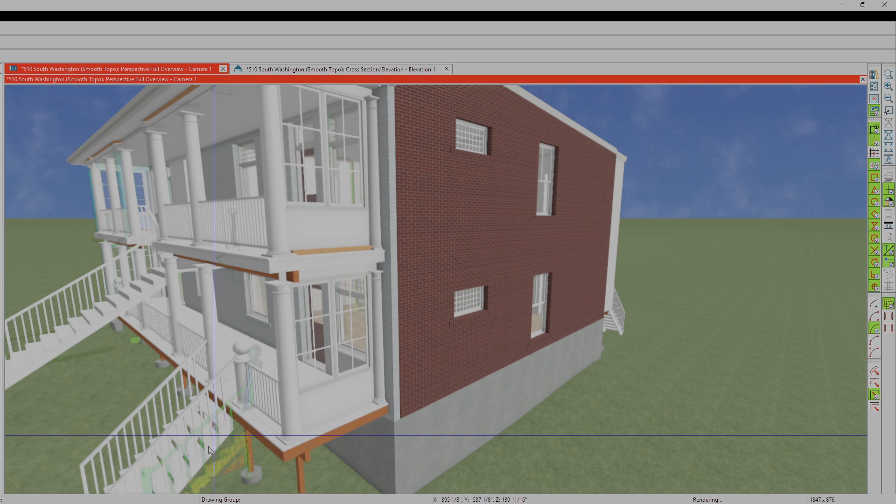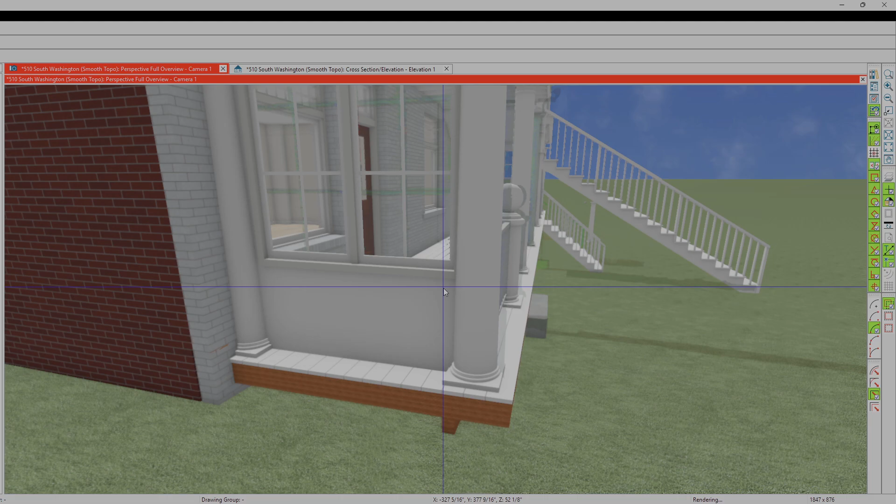I have got a few questions for the client on this project, and what you're seeing with these color things here are the ReCap visuals. Maybe that's a little hard to understand, but they're just section cuts through the 3D LiDAR scan that I brought into this model, and it allows me to take a look and determine what's going on.

You can see across this roof there was a lot of buildup and grime and stuff up here. So the fact that these are a little high, maybe okay, looks a little too high.

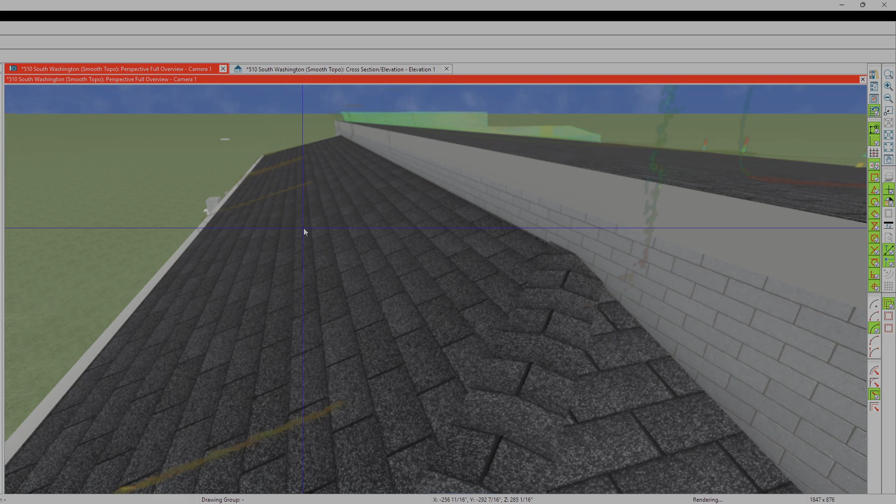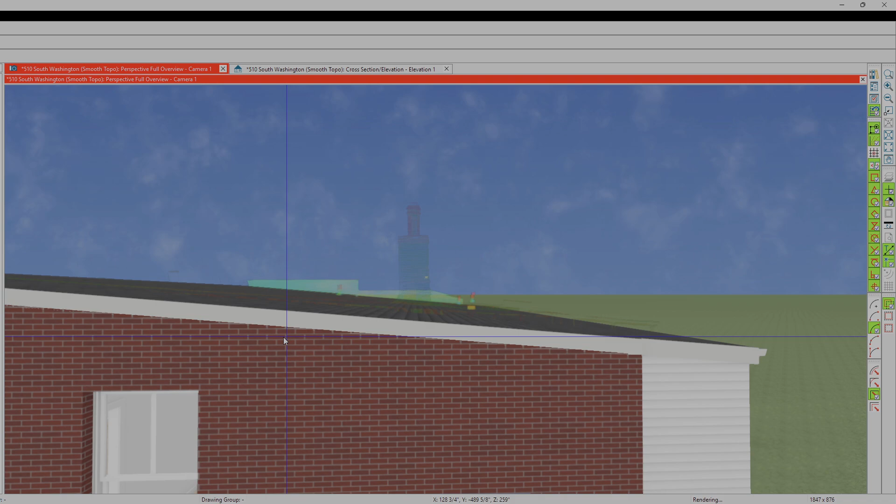So I have some adjusting to do, but the issue is that I need to build out all the brick detail. I need to build these parapets across the front and across the side, and then get the chimneys and all that stuff in here. Get this roof into the right type of roof, put the parapet on this side, and the brick detail work that goes onto a building like this. It's not exactly brick by brick, but it's a lot of very meticulous detail work.

So before I do that, I guess I've been requesting some feedback, and I know you've been out of town, but when you get an opportunity, I really need to discuss this, because I need to know basically what we're going to ask for from the URA.

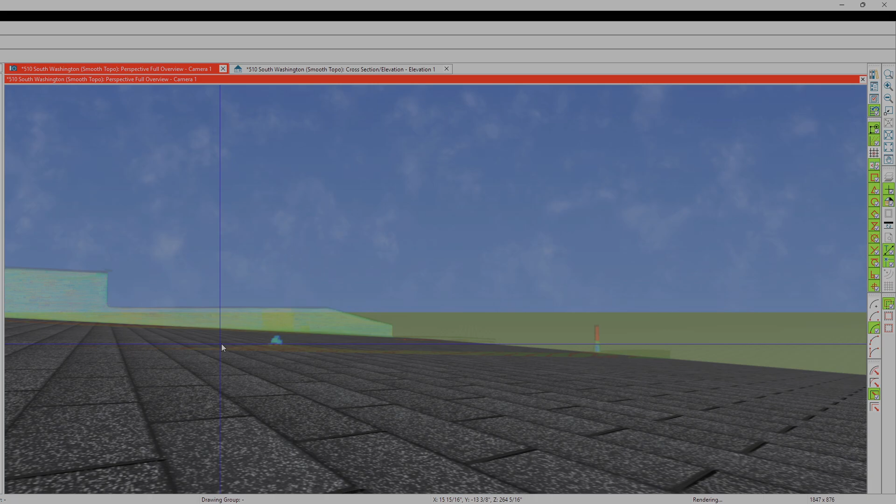There's a possibility that some of this may be able to be somewhat corrected, and I'll show you why. If you notice, this roof fades into the roof here, and when I go down below, it looks really good, and then all of a sudden it starts to pop out in the back half, and it gets pretty extreme as we get further and further out.

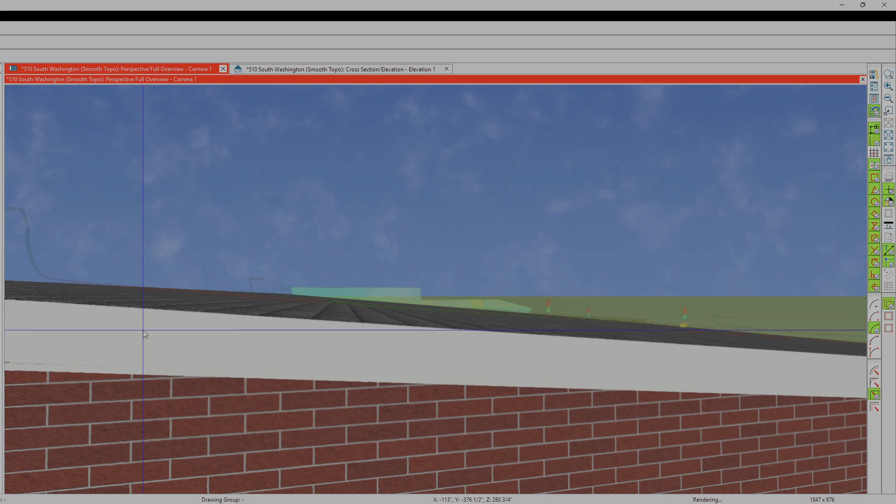And you can see this one probably needs to be adjusted overall, but you can see it just gets more and more extreme as all of them do, and they all get worse towards this back end. This is almost right on, but it's not perfect.

So again, it's being pushed up, and where that's occurring is if I go down in this crawl space, I started laying in some of the beams and stuff, and I need to put a section cut right at this location. I haven't put in that one yet, but it's items like this.

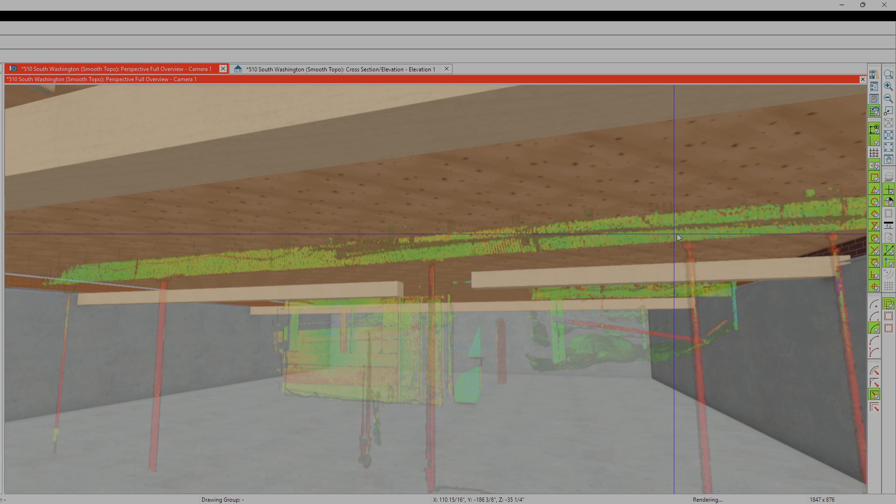This jack system, these screw jacks have been placed, and they've been raised to an extent that's actually lifting the floor on this back half. So it must have been done on several occasions, or the whole front half of the building is sinking.

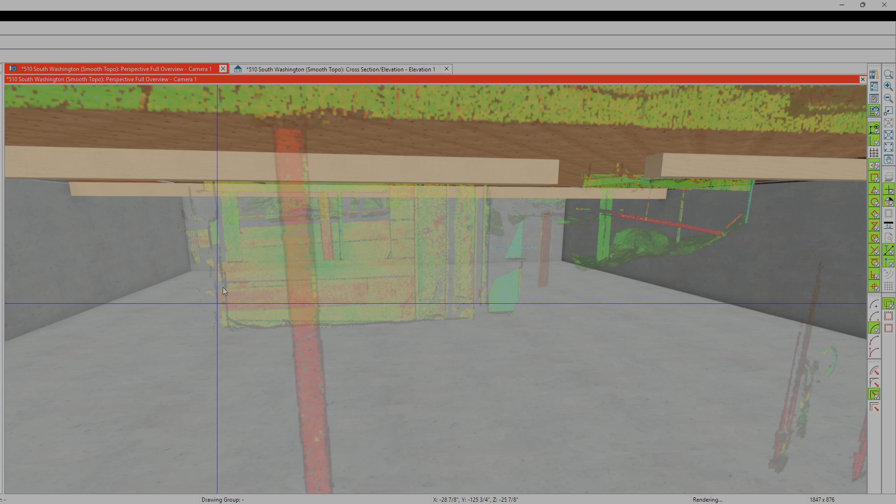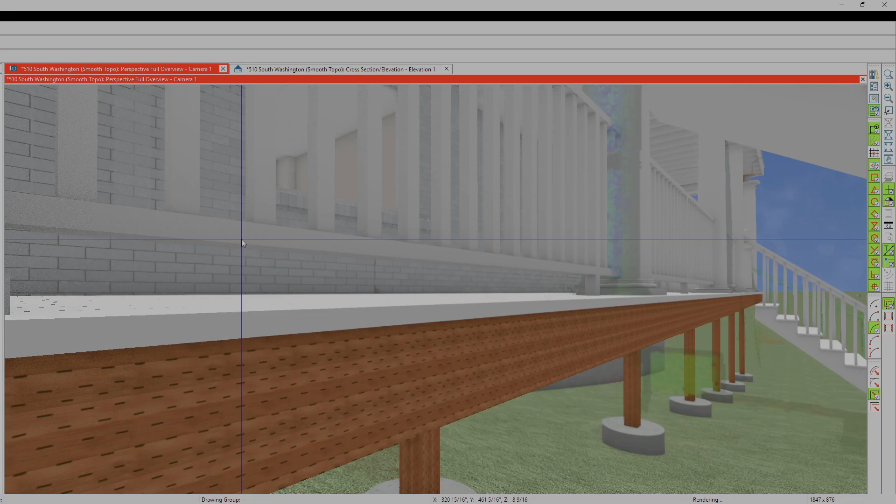Even if we decide not to correct the issue, I think we need to make sure that it doesn't get worse and that you lose the building. So we've got the drainage issues that are on the south side, and probably need to look a little harder at just making sure that we don't have the same types of issues on the north side.

And I'd like to speak to you about our URA approach before I wrap this up, to find out for certain if we are going to be, whether or not we're going to ask for money for that.

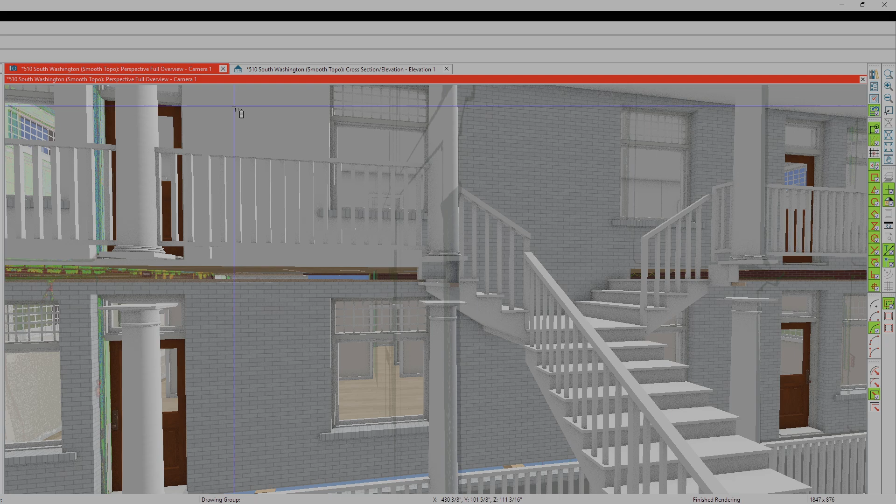And so I missed it. There we go. Nope. Control Z.

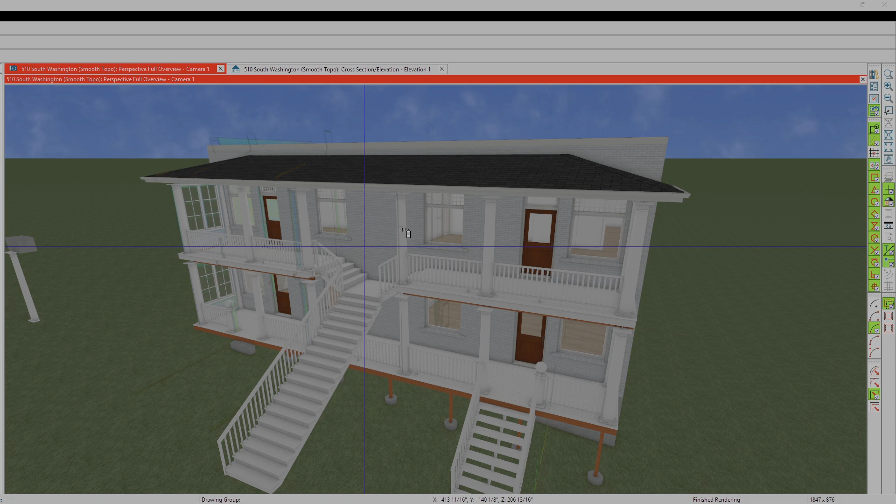So I will get some other views. I want to add some other views into the way that this looks. Sorry, I paused that slightly because I was trying to correct this brick. And it's a little difficult to correct the brick using these, because these images, oops, I may have just painted that. Yep, I did.

Oh, in fact, that's great, because now you can see that see-through image. I just painted it brick color, but it's actually an object, it's called a face. I'm going to Control Z to get that to undo, then I'll hit escape. So it's hard to select through these.

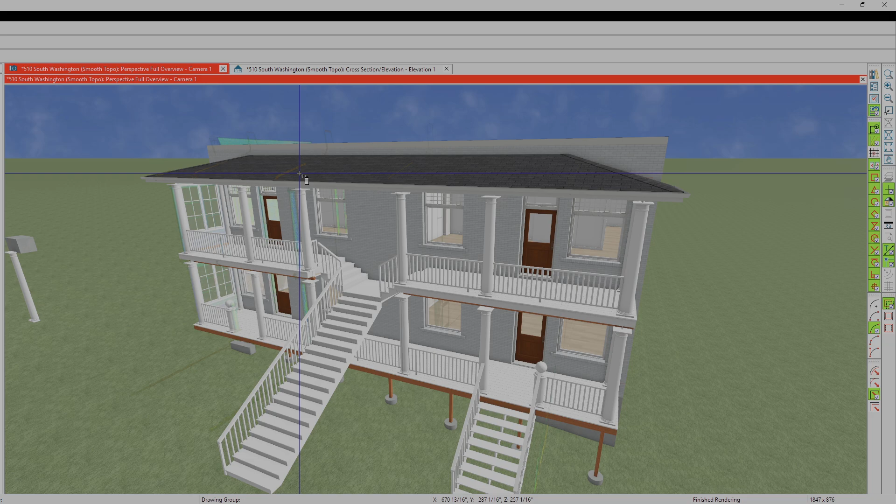There's been a request I've had with Chief to give us PNGs that we can make transparent, because the issue is if they're full brightness, then in other views such as section views I can't see very well.

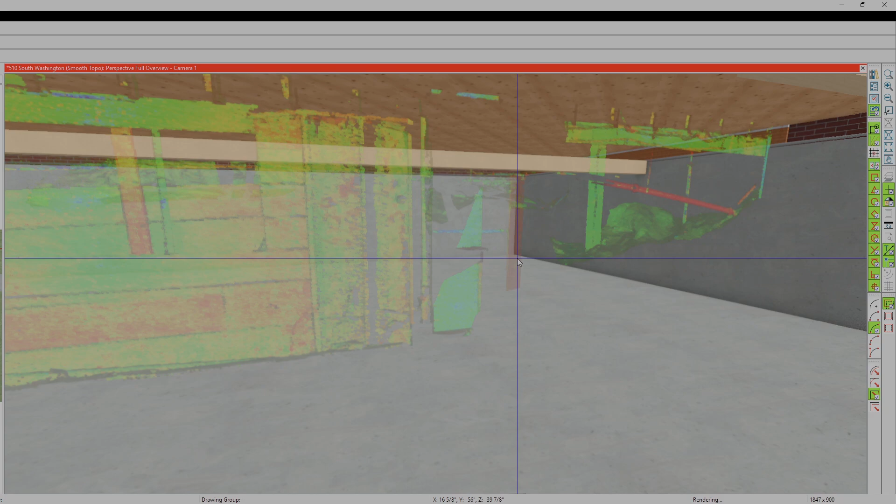So down here in the crawl space, let me turn this layer thing off. These jacks I think have been over lifted. It's that or this end has settled even greater.

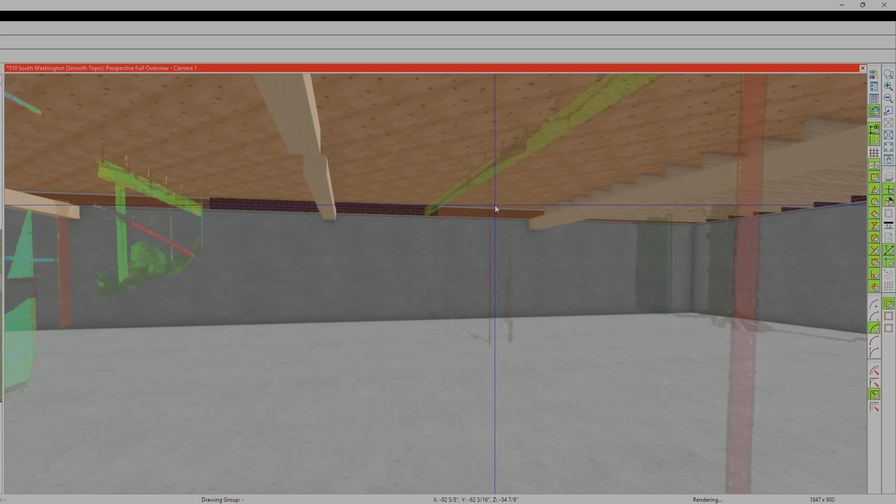So determining which, I'll get more answers the more I continue to put all the beam work and stuff in here. But that's not part of our original scope at this point. We're getting a little further along, and so I need to discuss how we're going to approach them, because what I'm concerned with is that your building gets further damaged to an extent that you actually risk losing it.

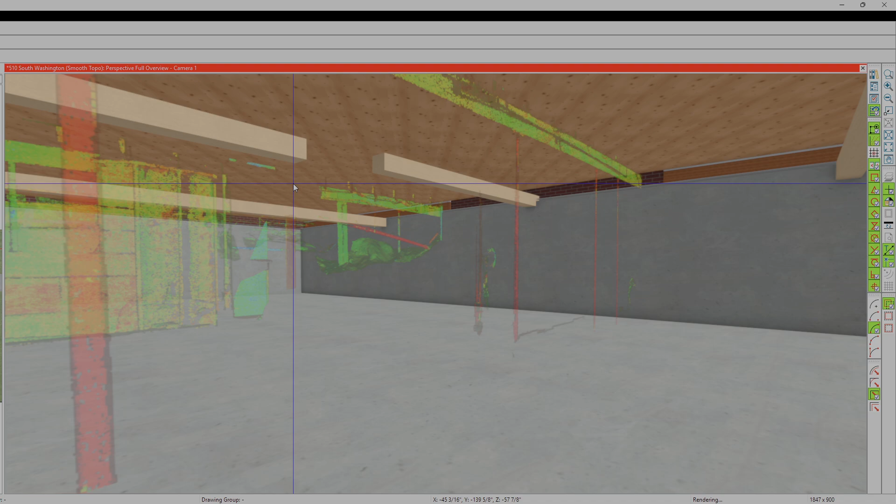So I will supply some other images and then we can discuss this. I went through and I changed some of the materials, and the EPDM helps the scan show up pretty clear.

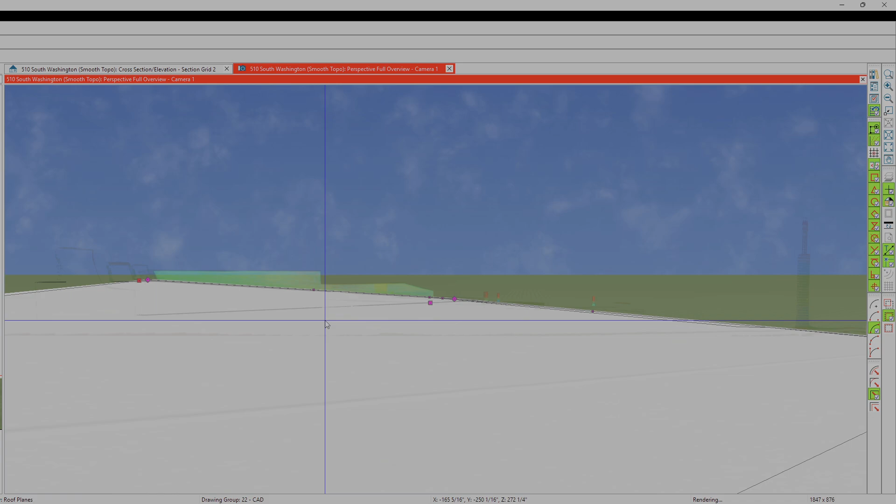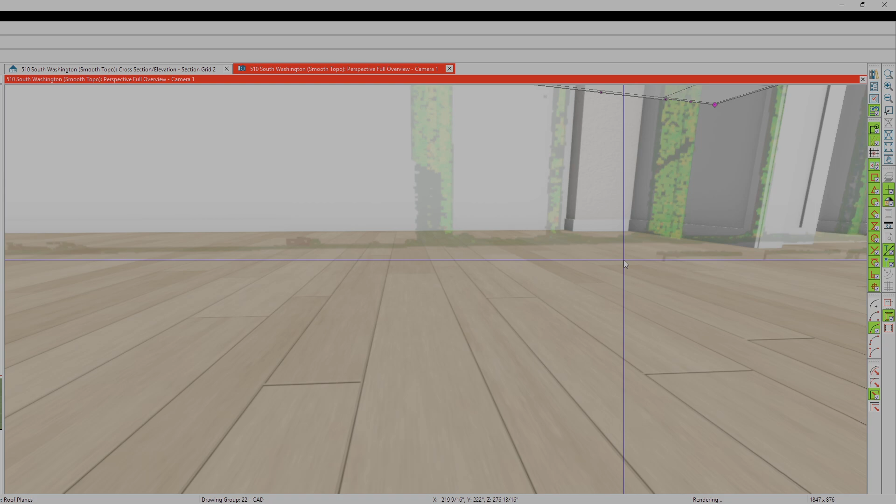Also doing some changes on the way I've got the floor and levels set up to match what I'm getting out of the scans, and we have to do some slight adjusting because I'm still getting these scans showing up above, but there was a lot of dirt and debris. Back here, this is where the problem starts to show up.

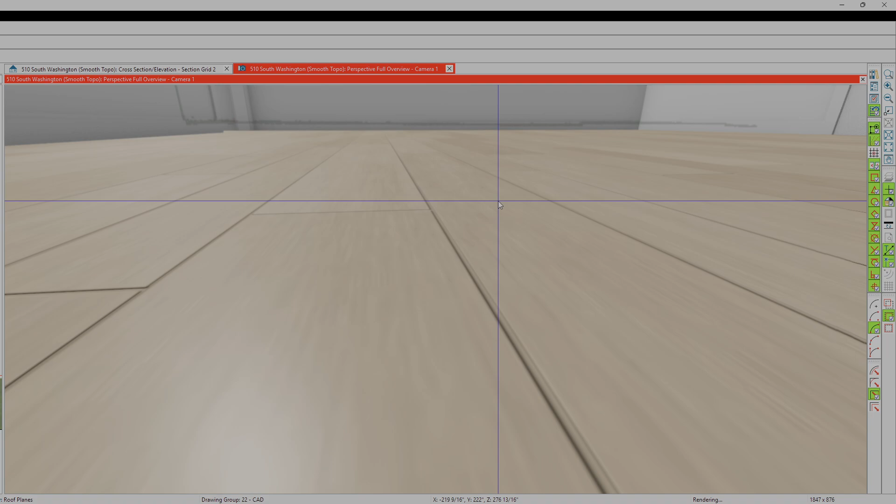As you can see, that just gets higher and higher, and it's substantial. Looking back towards the front, the whole wall disappears into the floor, as it should, and I think it should be a little bit more, but I'll keep correcting that. I'd like to get some answers on what we're going to actually try and correct in the field.

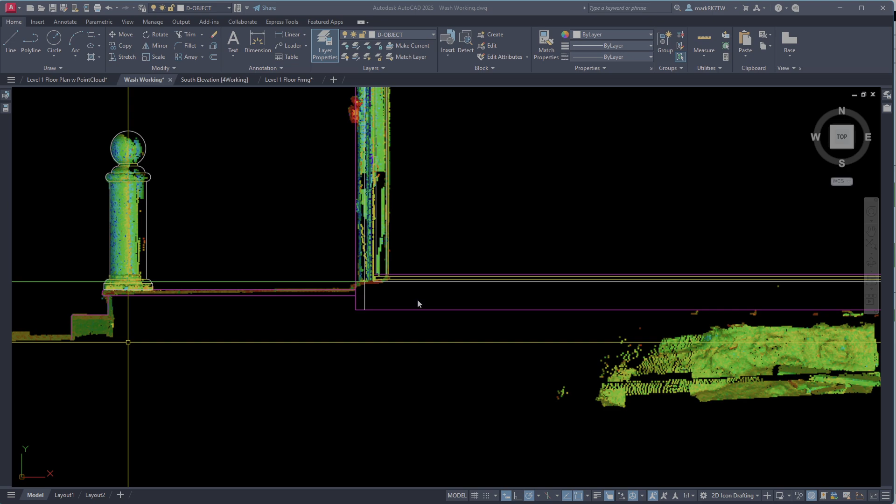Here in AutoCAD, you can see I've got the scans and stuff, but you can tell where it really is dropping off, and this is how I'm getting my heights determined.

So this is the 2 layers of 1/2 inch. I've got a 5/8 inch finish wood, which we don't have installed yet, and then the 3/4 inch. So that's a 1/2, 1, and then 3/4 of that angled planking that's in the house, and that serves the same for both layers, or both levels I should say.

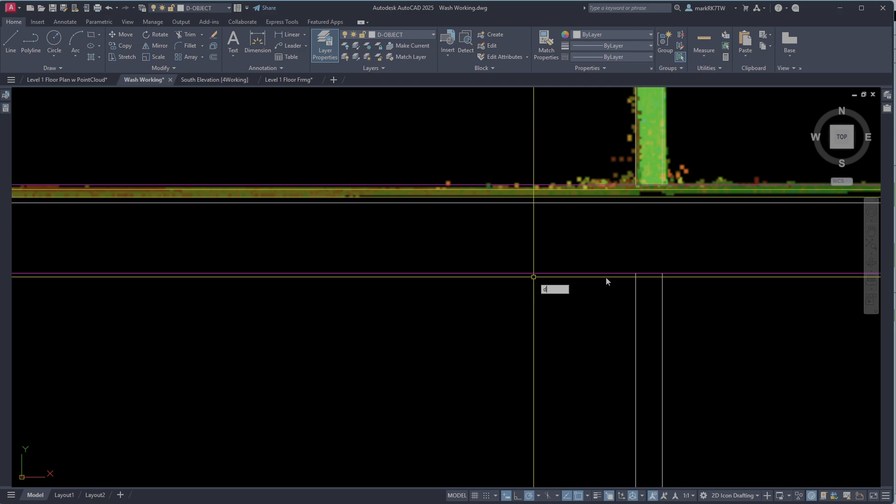Then there's the beam dimension, and you can see that's 9 1/4. It might be a little hard to read, but that's what that's reading if you can't see it on the screen.

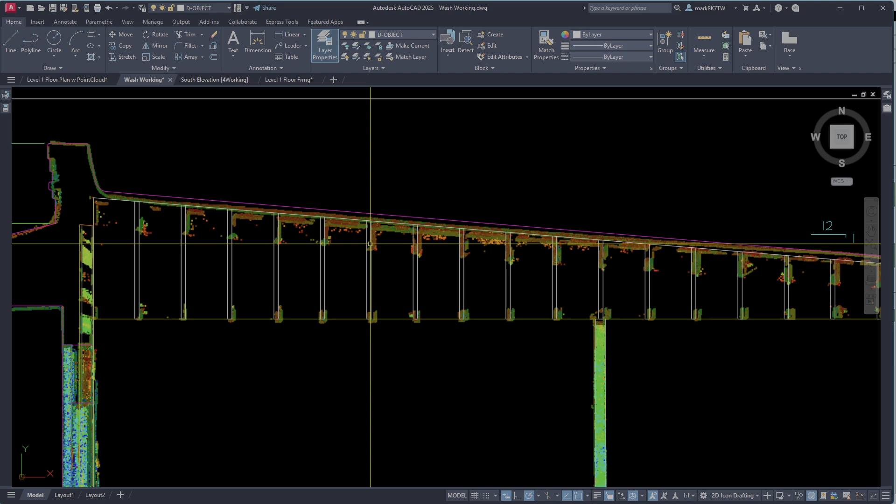When I start to pull all this in, I've got to get the best average pitch, and so you can see here I'm above, here I'm passing through, and then here I'm quite a bit below, and this is where the whole system's been shoved upward.

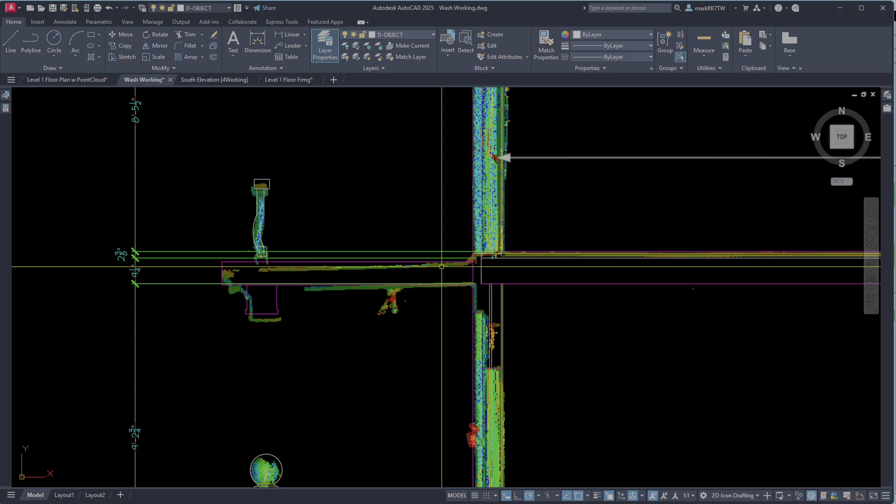Where this is dropped, what I've done is just kind of taken the average going up, creating straight lines off of places where I feel things have remained stable, but you can see the slope through here. Using this as a guide for the size, it's just pushed up to where it should be, and then up here we'll have the roof.

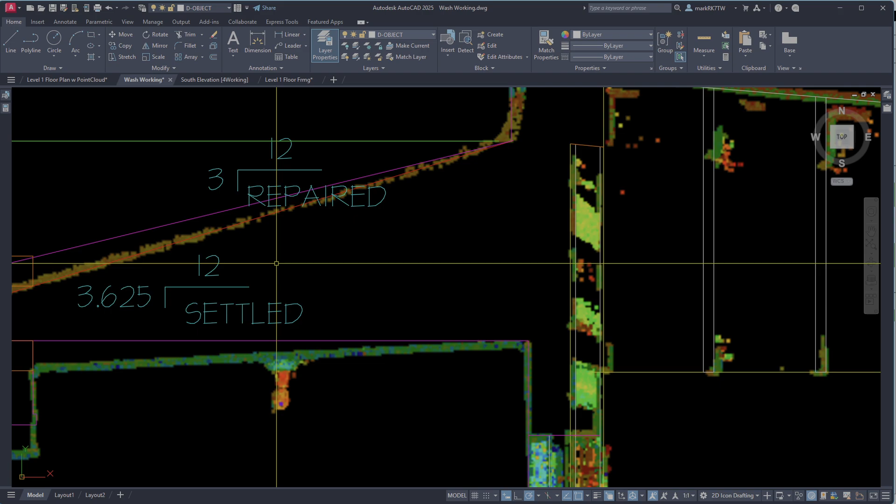Right now I do need to correct the roof, and so what I've got is I'm showing about 5/8, 3 5/8, and 12 is how it's settled. When I flatten it out, it becomes very close to a 3 and 12. So I believe it probably was originally a 3/12 pitch.

This averages out to a 1/12 pitch, and trying to draw all these individual trusses would be a nightmare because each one would have to be individual.

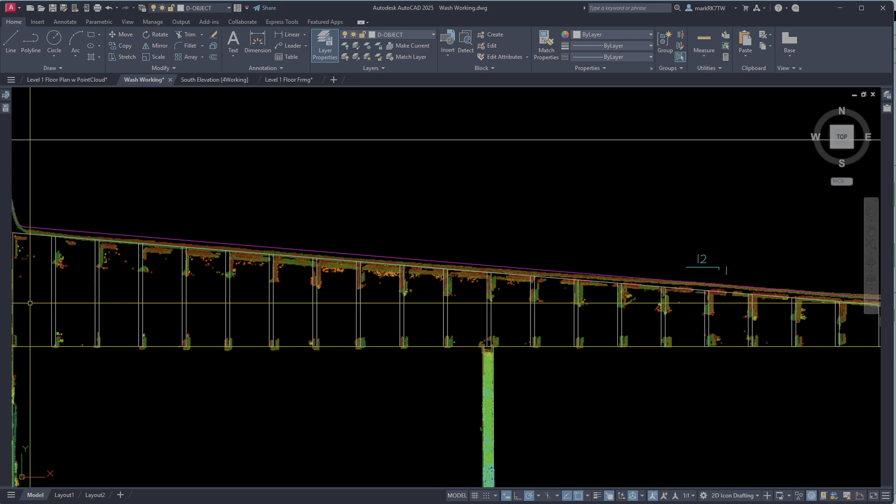So I'm going to frame it as if the trusses were running the way we would in modern day, but it shouldn't affect what we're doing because we're not changing what's going on up here, unless you want to do some of the repair work.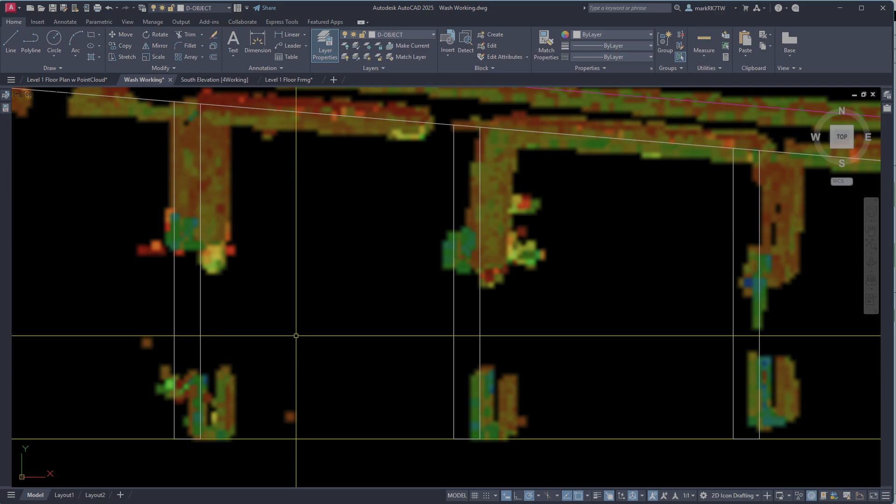You can see there's, for the most part, like that member seems off, this one seems off, but if you look, there's something going on in the background for those, and the rest of them, they're fading off, meaning they didn't get them exactly at the on-center that I have, which I am showing them at 16 inches on center. As I get closer up in here, they match really well. It's just old construction, and it's just faded off a little bit.

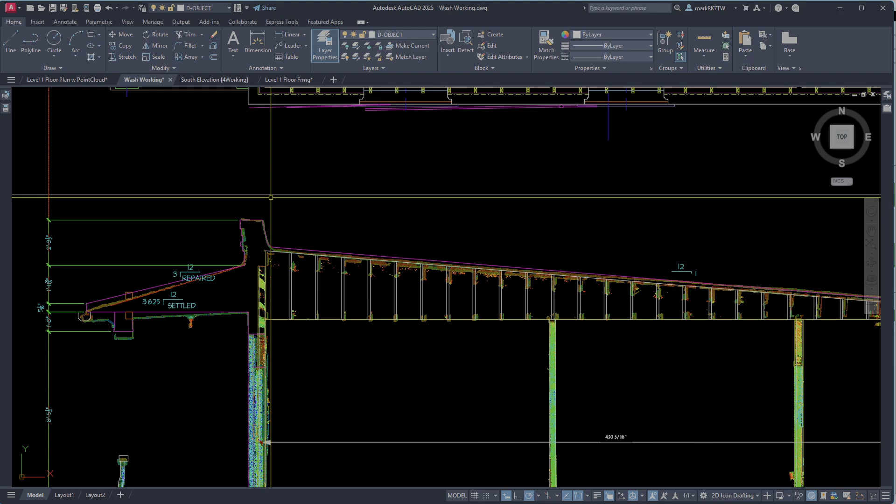So just kind of getting a trace layout for this parapet, so I've got something to go off of to do this brickwork.

Down in here, this is dirt, and I'm a little concerned about some of the excavation that's gone on over time and what that might be causing as we go through this.

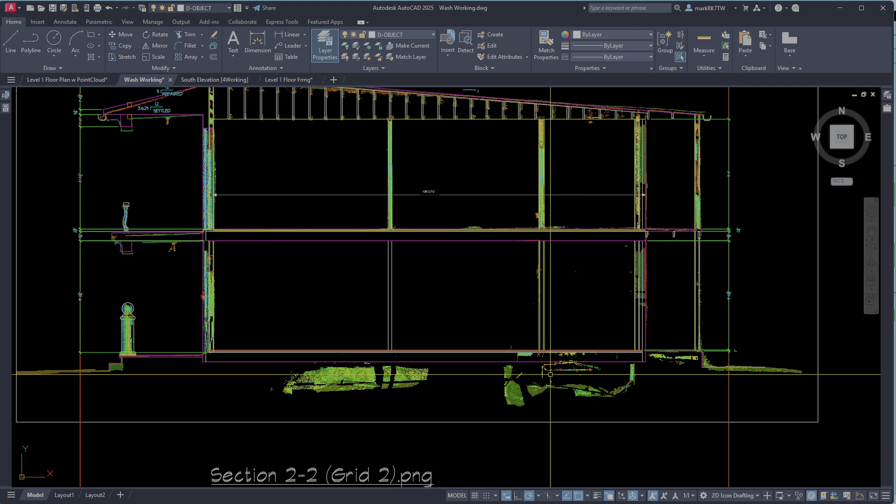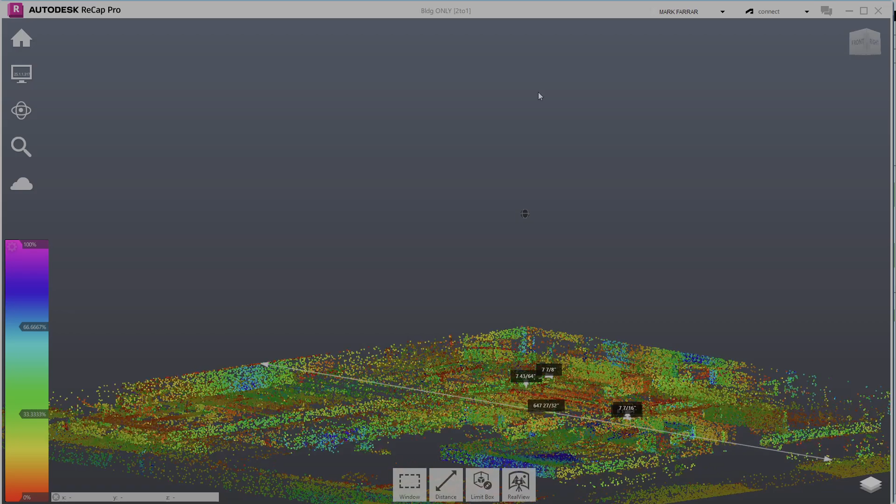And so here in ReCap, this is just the lower floor system, and you can see that there's some dirt and stuff showing up there, and then trying to capture every bit of it is just such tight quarters that it's not completely captured.

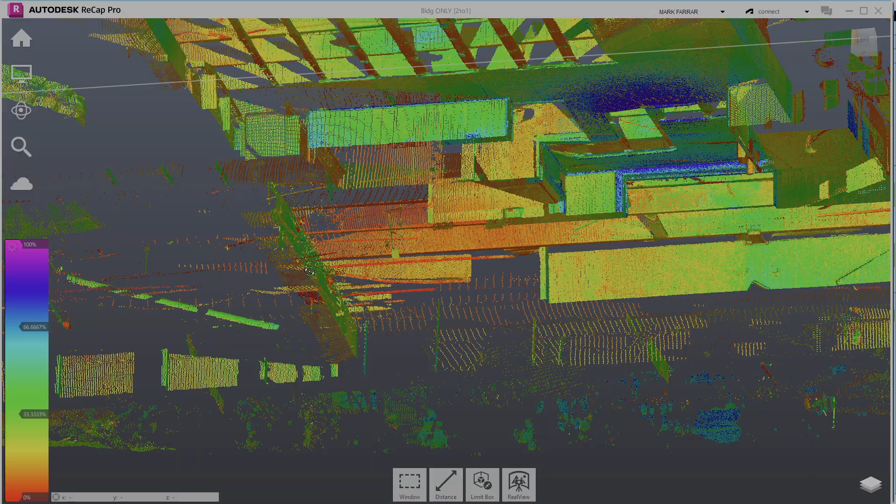But we've got the basis for information, and what I've been working on is trying to figure out where these beams are. If I look underneath, you can see there's a beam here, and these tend to be about 8 by 8 beams through there, and there's a couple of those.

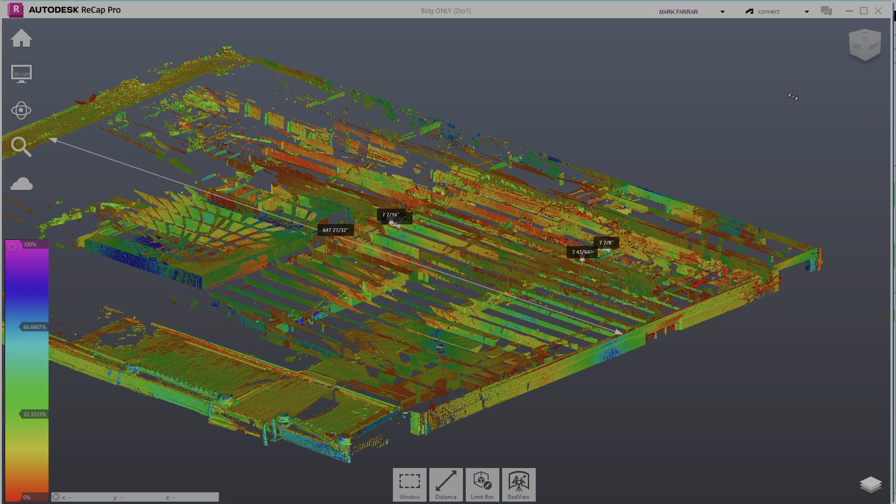But then in this mid portion, I've got to do a little more digging around to try and figure out exactly what's holding this up, so we can try and correct it if we need to. That's where I'm kind of looking to, you know, what do we want to accomplish with this. So I'm going to show you here.

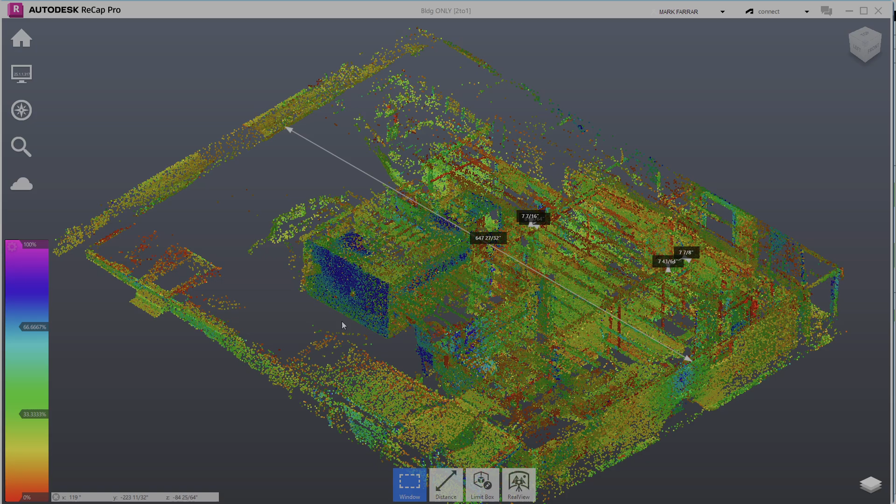I'm going to go to edit. Sometimes it'd be hard to grab this. There we go, and I can bring it down. Now let's confirm that. So there's a room in here.

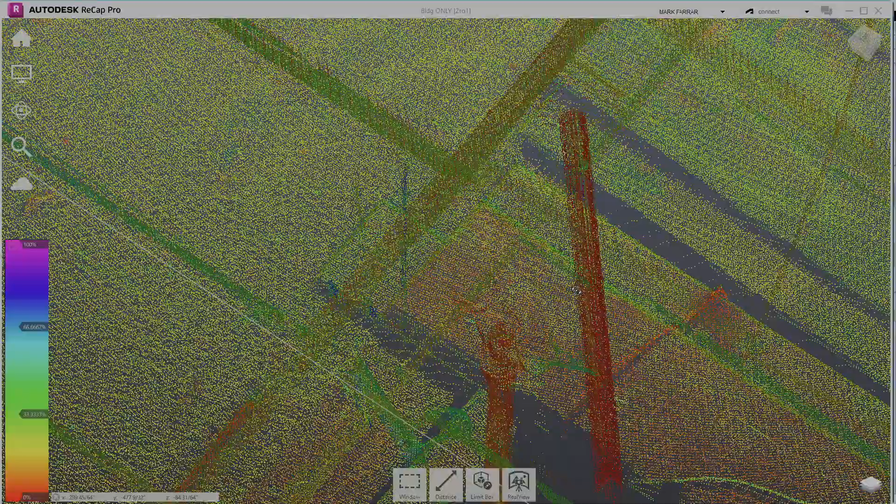And then I've got all these posts, and you can kind of see them through there. If I go up top, it's a little easier to see, and I could actually turn off the dirt. As it's moving, you can see it better, but there's a post, there's one, and then our beam is across here.

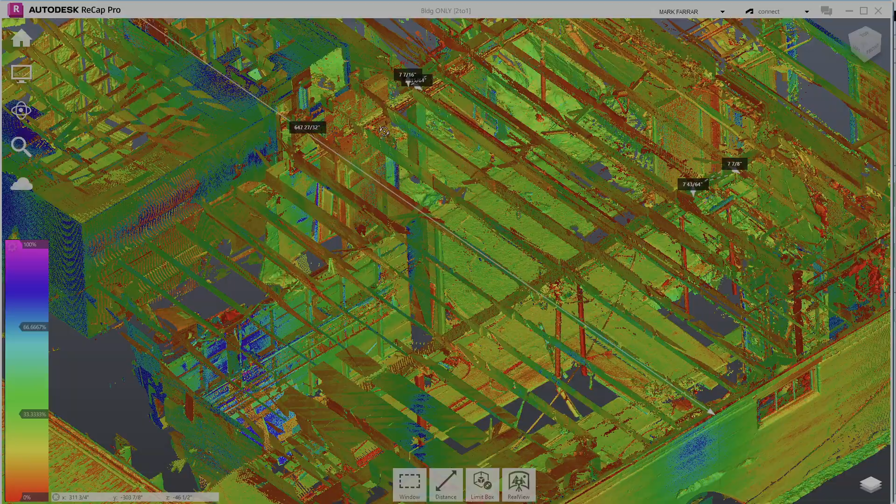These are our joists, and so it's determining what we are resting on at this location. Still got some work to do there, but it looks like there's a room built out down here, and I was wondering if you knew if these are strong backs that were put in here.

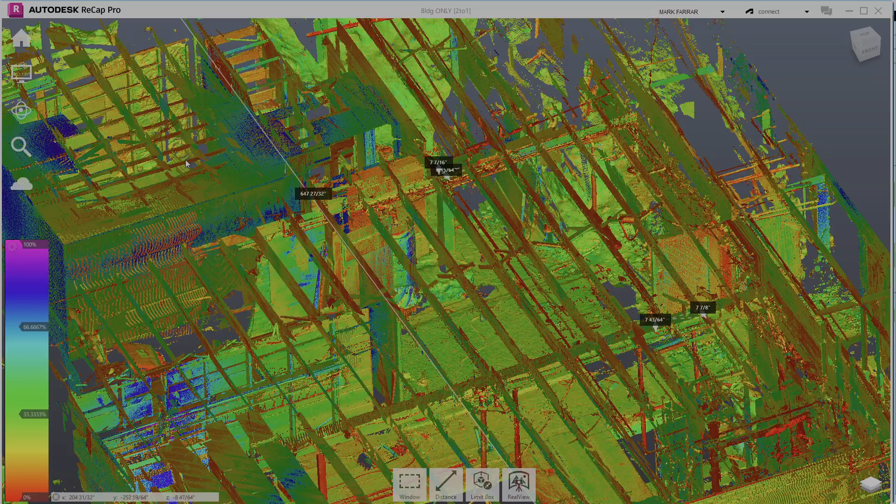It's a common practice in the old days back east. And if you don't know what those are, please just give me a call and we can discuss it.

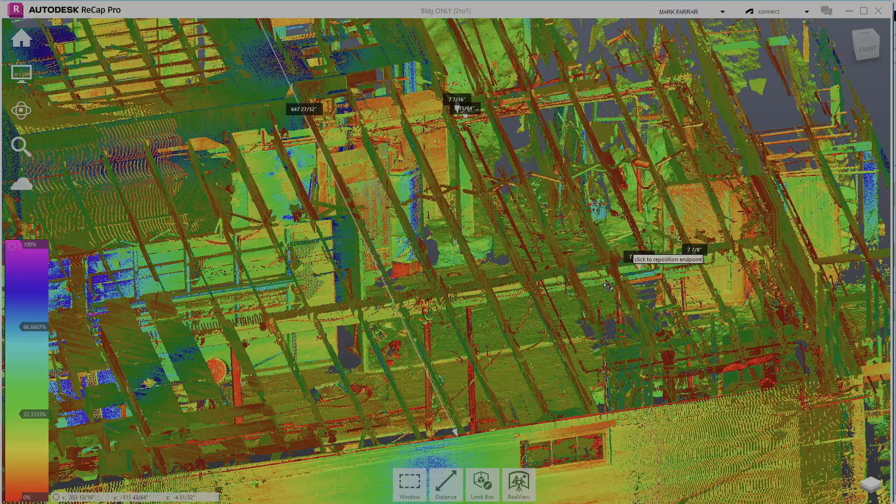But yeah, what I think has happened is these jack posts that were put in here have just been overly jacked, and it's pushed this whole floor system up. On the other sections I've got drawn, you can really see it, especially on this particular one, that it's really shoved up quite a bit.